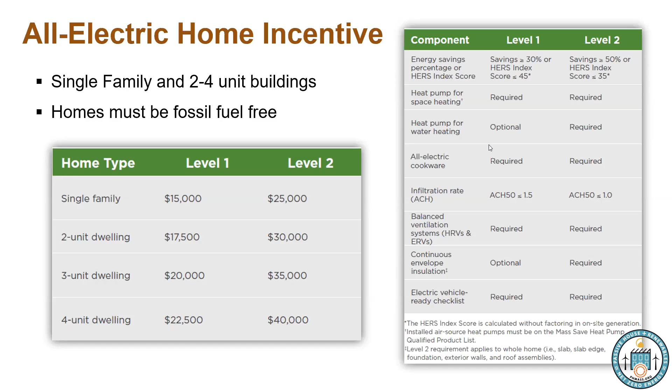I see a bunch of folks on here, and I see some names of people already taking advantage of these, so I think you guys know. But for those who haven't used these yet, I'd like to remind you that you can enroll in this program and take advantage of the first couple incentives, the feasibility study and the energy modeling, right away. And even if you don't go through with the full Passive House program, you still get those incentives. So if you go through the feasibility study and realize this isn't the right project for you, but your next one will be your Passive House project, the feasibility study is still covered.

So I encourage everyone who's even thinking about Passive House for the next project, which if you're on this session I assume is all of you, to enroll in this program and take advantage of the feasibility study from the very beginning.

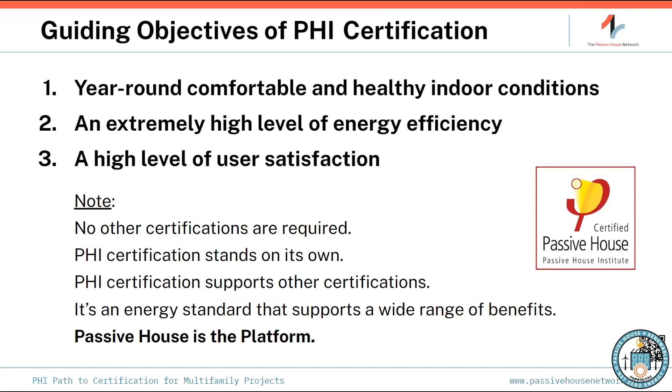Reasons to certify in general, and in this way in particular. So independent review, of course, we need this not just for general best practices, but there may be incentives, or as we know in Massachusetts, regulatory requirements. And so that's very compelling.

As compelling, perhaps, is just this idea of expertise and institutional knowledge that the process of certification brings to a project. It helps you avoid false starts and errors through the process. There's nothing worse than getting down the road and realizing you've hit a dead end and you've got to back up. You want to start out strong and continue down the path.

And as such, focusing as we are on education and capacity building, we see the certification process as a fundamental education tool and for professional development for the team across the board.

And interestingly, if you're working on a passive house project and you're not a CPHD, not a certified designer or consultant yet, you can actually earn the credential by completing the building. You don't have to take the course. You don't have to take the exam, although it might pain me slightly to say that. You can get the credential by doing a building. That's really PHI's fundamental thing, is do the building and learn by doing, as we do with so much of our professional lives. So that's another interesting way to go.

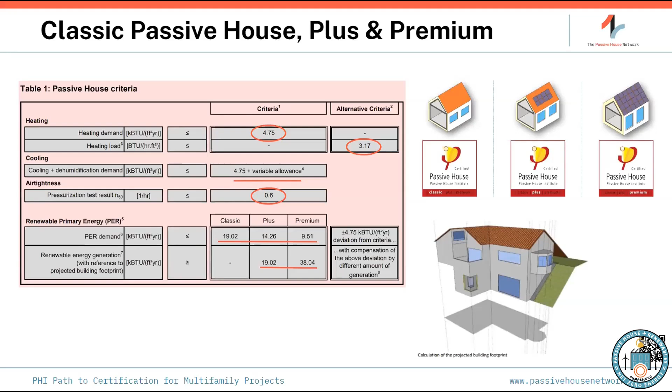On the retrofit side, EnerPHit has been around now for 12 years, and it has two different basic ways of approaching the EnerPHit certification. One is a component method—you see the values across the board for the different aspects of the envelope construction, adjusted per climate zone, using PHI climate zones. So you are in the cool temperate zone in Massachusetts. Then there's the performance method, which is basically a tweaking of those calculated performance results—from 4.75, we're going to 7.92 in Massachusetts.

Both of those methodologies then share in common a loosening of the air tightness from 0.6 to 1 ACH50, and a loosening of the PER demand. I think the renewable, however, stays the same.

Another aspect of EnerPHit is you have the classic, plus, and premium. You also have cases where the insulation is largely on the interior of the structure rather than the exterior—so you have the I, the plus I, and you have a retrofit plan that could be certified.

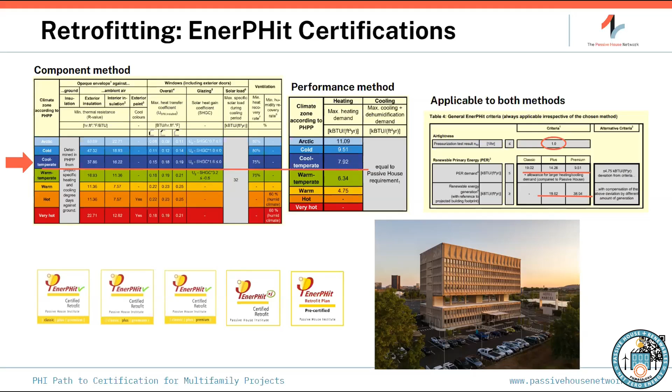And then we have the low energy building standard—you have a slightly relaxed heating requirement, 1.0 air tightness, and slightly relaxed PER, I believe. We do see this used, because for single family homes, it's still an amazing building and performs favorably across the board in relation to other standards out there.

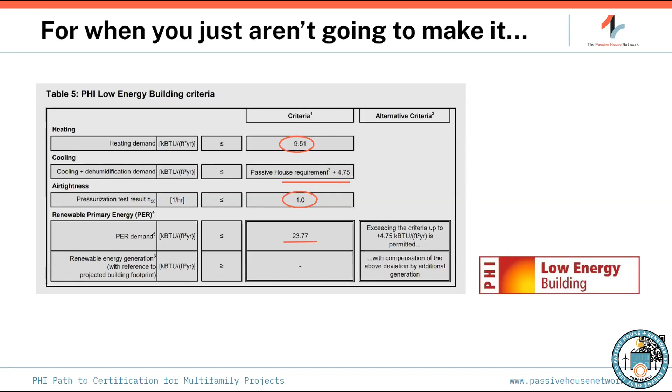We have incentives—Xcel Energy, which is supporting the Marshall Fire rebuild in Colorado, will accept a low energy building certification as a passive house. They'll also accept the other passive house certifications, but low energy is good enough. So that's a quick overview of the certifications available from PHI.

So what do we need to do to get certified? There's this great building certification guide, and really I could probably just ask you to download this and we could all go home, or go on to other work. It's a good guide—it's not going to cover everything we do here today for sure, but I encourage you to download it and flip through it. It's got great examples and links to examples of things, talks through the process, some of the rationale. I should also note that in the criteria documents, you can get quite a bit of the rationale behind what's going on there, definitions, links to critical things, so you have an authoritative reference guide.

So the primary tools that we're using for PHI certification in multifamily: virtually everything is being done in designPH, which is a SketchUp, 3D SketchUp model souped up for passive house. All the values go into that, and then it's imported into the PHPP and manipulated further there. But architecturally, a majority of the work is certainly being done in designPH.

And then you're looking at doing thermal bridge calculations as well, through Therm or Flixo or others. There's an amazing and expanding list of additional tools, some developed by PHI directly, others developed by practitioners from around the world, available on the PHI website, Passipedia, which is a resource. If you're not familiar with it, definitely go online, Google Passipedia, there's a lot of reference material there.

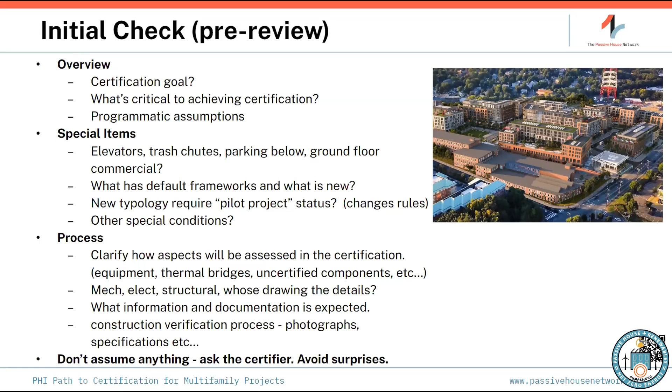So important, and to get a basic grasp of that - don't assume anything, ask the certifier, and please avoid surprises. Things change in projects, and certainly things can be unavoidable, but do what you can to lay it all on the table. Now, with many of these multifamily buildings, the commercial base is becoming standard, if not ubiquitous.

And this has been an issue historically in terms of how we're dealing with the values and how we're resolving it. Now, in the criteria book I first showed, there is this table, and it's a little mind-numbing to go through all very specifically, but basically we've got this gradation of occupancy. On the top line - the user of the ground floor is known, and we're going to build it to passive house quality: air tightness, thermal values, ventilation. So the whole building can be certified, and the plaque can go on the outside of the building on the curb. The second one - the user is not known, but we're still applying passive house air tightness, thermal, air quality, and ventilation, making some assumptions because we don't know who it is. So there are default values that have been developed for that, and you can still certify the whole building and have the plaque outside.

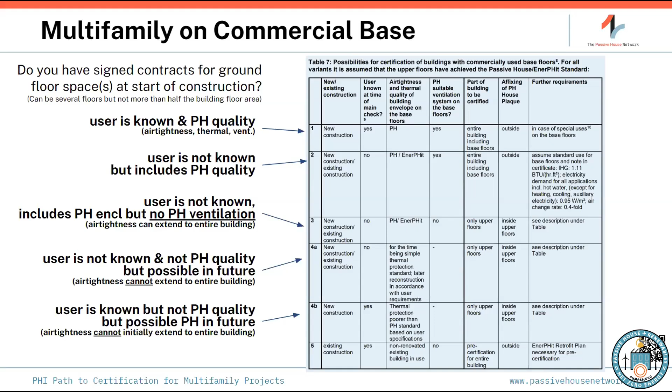So that's some of the clarifications that have developed in picking your pathway and what you're going to need to do. And what's happened is, you know, this whole question went through a process, and you need to think about when you're doing your passive house project and the typologies and what you're asking for.

Because if you are to be the first of something, often it's not going to be what I would call a normal process. It's going to be a pilot project, first generation. PHI is interested in them because that's how we extend the standards further and make it work. But they want to go through a scientific process. This is a research organization.

You know, so the PHPP is a simplified model built on lots of dynamic modeling and lots of data. So this has each new typology going through it. Then once they've got a simplified criteria, often you'll see test projects then to use it. And then they'll issue a final criteria for regular usage, and you'll start to build defaults in.

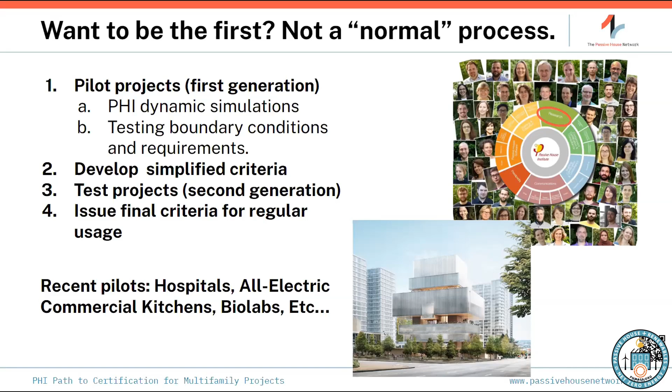So by and large, using multifamily ground floor commercial, you're at this point going to be relatively smooth sailing in terms of the criteria and defaults. But you may hit something if you're going outside the box. You want to know that. And again, that's that early check. You want to lay that out there.

So then we're going into schematic design. The team is launched, and you're working in schematic design and design development. This is important to do, I would say, before you're going into construction documents. You're going to really dig in, and the certifier is going to assess the concepts for the design, insulation and the building services, the preliminary PHPP calculations for consistency, key information, and the certifier is going to provide you feedback, and it's going to help you in managing the energy budget and your costs.

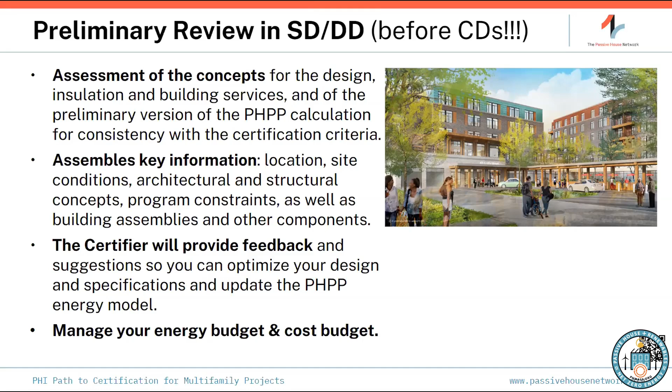So you want to get this feedback early and know that you're on the flight path. You also want to manage your energy budget like you do the cost. You need contingency in there. You don't want to be designing up to the limits. You want to buffer and build that in so that you have some latitude going forward.

A big assist in bringing together the design is to rely on certified components. PHI has an extensive library at this point of certified components, and the key components in terms of driving performance - you see them in different categories: the opaque building envelope, transparent building envelope, and building services. They're rated based on climate. The thing that's great about components that have gone through the certification system and are in the library is many of them are already in the PHPP. You've got the values, so it's predictable, high quality results, and a smoother process.

So if you go outside of certified components, then you're going to have to provide substantially more backup to prove the performance. Some manufacturers may have that ready - they've prepared for it - but others may not, and it could throw a wrench in. So you want to carefully source the critical components that are driving the energy use of the building.

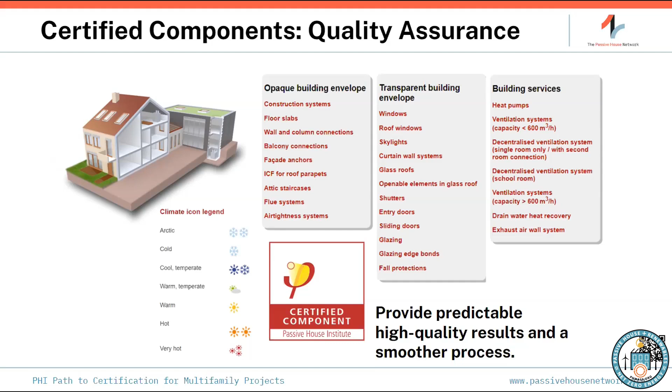I just want to outline three that we can't overemphasize how important they are: the efficiency of the ventilation units and how they perform, the performance of the windows, and the air tightness are all huge drivers of the overall energy model and optimizing cost and approach. So there are always trade-offs in this, but to not trade things out lightly, you really want to make sure you're digging into it, if to state the obvious.

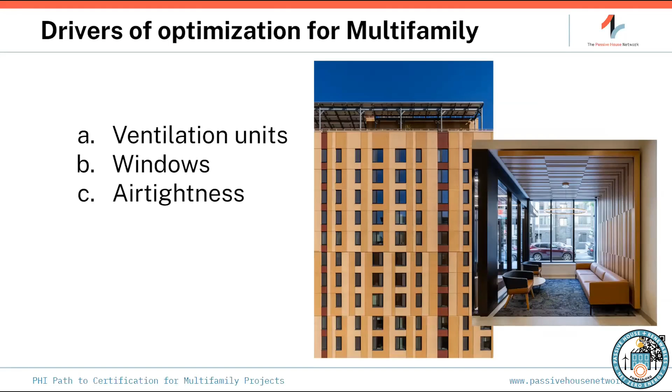As you're going through this preliminary design check, you're starting to gather information, and some things may be decided and you can upload it. PHI has an online platform for the certifiers. Not all certifiers use this - some have their own kind of checking mechanism - but this is a very powerful platform that allows you to see what's been completed and what needs to be completed. It takes some mystery out of it. It shows how far you've progressed and allows you to really zero in on what's the missing information, because there's quite a lot going on there.

Another key aspect in the preliminary design review is variance, and the idea of using defaults versus the boundary conditions, the so-called real world. The PHPP and the approach comes with a whole bunch of defaults. Everything is not a default, but there are a lot of default values in there that you can rely on for certification, and it makes perfect sense to do so. Others, maybe not so much.

Many boundary conditions and values are preset as defaults and should not be changed for certification. So for the certification, the default is fine. But if the variation of actual use is significant and known, a second variant showing it must be calculated. In the PHPP, you can run a whole bunch of variants and show different loads in different ways and different usage patterns. You can show different future climate scenarios, and it's not uncommon to do them for things like hot water or future climate or other specific scenarios.

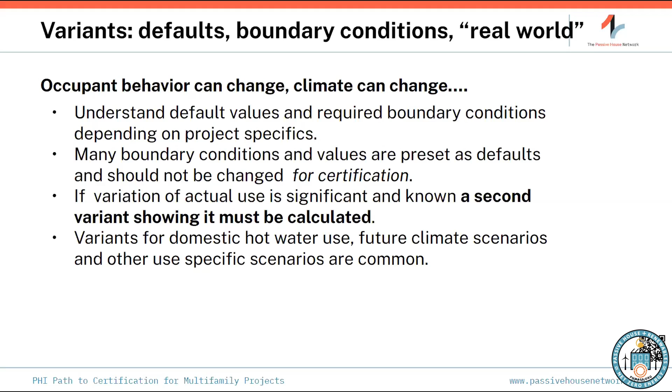It doesn't require building a whole new model - you're just putting variants into the same model. But you need to know within reason how this building is actually going to perform. There's always going to be variation, but you calculate from the facts to that point, and that may not exactly be the certification calculation. It's going to depend, but you don't want to ignore that. That checking - the second variant showing it must be calculated - is part of the certification process.

So you're continuing to design the multifamily building, and you're bringing the information up further. You're nailing down the supporting documentation, the specifications. You're making corrections per the certifier's requests. The certifier is going through the models and the documents and says, okay, this is done wrong, this needs to be updated, where's this information - to make it as complete as possible before construction starts.

A quick note on what the certifiers are thinking about, because you're in this ongoing conversation with them, are the assumptions that you're making, that the team's making, appropriate to the project? They need to see the thought process of the team. Don't be a blank slate. Don't hold back. They need as much information and to understand what you're trying to do as possible. It will help streamline the process.

Is it a complete PHPP? There are lots of little things that go into the energy calculation of a multifamily building. Are the elevators in there? Are the booster pumps accounted for? Are they accounted for correctly? What's the specifications?

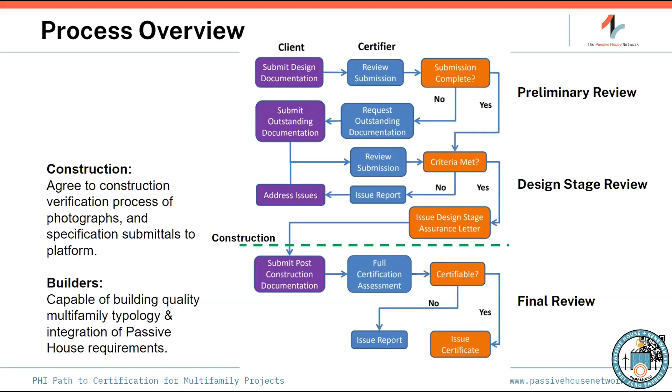So in the construction, just threw down a bunch of things here. The focus is on passive house integration with the other requirements. Where PHI is focused on the elements that are driving the energy performance and ultimately the user satisfaction and use of the building, those three original principles that we spoke to. But there's a lot going on and there's a lot of other things that need to happen.

So the construction schedule needs to have a critical path with the PHI requirements identified. You need to be looking at the sequencing and components. Things like mock-ups on a multifamily will be quite typical of critical assemblies that will be responsible for making sure that we have weather tightness, but thermal continuity as well as air tightness. So that should be planned for if needed.

A lot of this too depends on, like we were saying at the beginning, how many times has the team done this? Is this new? Have they've done 10 of them?

The more inexperienced, the more you want to go in deep, and the more experienced, the more it could just be like we're doing a blower door at the end, and not doing any blower doors down the road, and that's good enough. So trade specific training - what we're seeing is the management often getting the certified tradesperson or some aspect of it, the project manager, and then doing specific on-site trade training specific to the task at hand. Because again, it's not rocket science and they don't necessarily need to know everything.

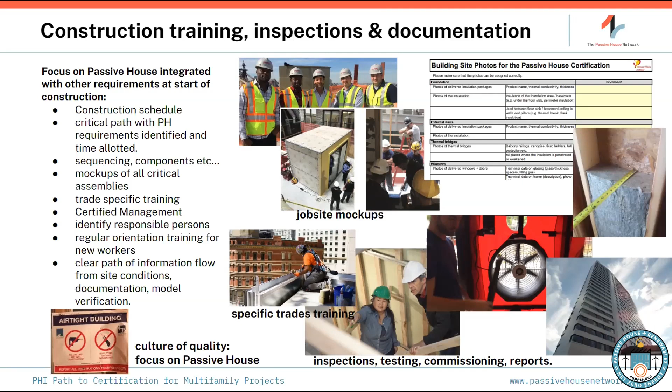So for the final review, you've gone through construction and there's a lot happening there, obviously. But at the end of the day, for the final review for certification, there are 6 things that need to be evaluated. And these have subgroups, of course, but number 1, as-built construction plans, details, and component specifications of the items - so as-built, what was actually installed, regarding the thermal envelope, the building services and other items agreed to. So everything that's driving the energy performance of the building. As-built PHPP, showing the energy balance calculation, meeting the metrics of the criteria in the certification.

The installation photographs that we've spoken of. Then the ventilation system commissioning report, because the ventilation system is like the air tightness report, which is next, is absolutely fundamental to the proper operation of a passive house building. And with those reports, you have the construction manager's declaration attesting to all that has been submitted. That's what they need, no more, no less.

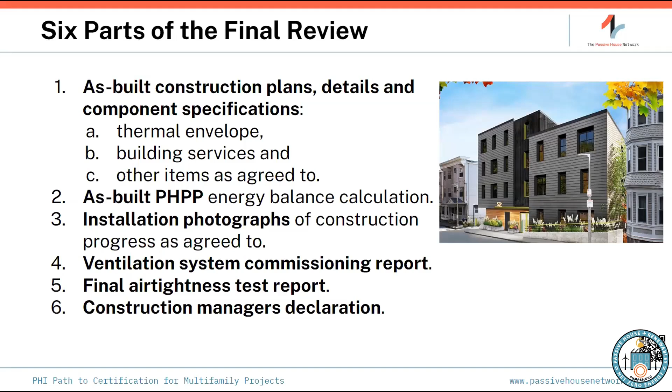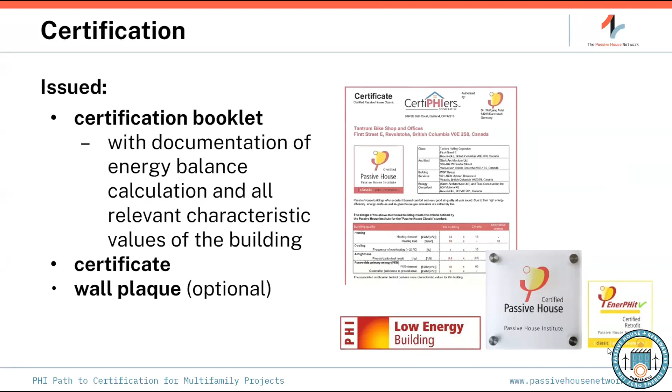One thing that I just want to stress is this is outside of the certification process, but a useful reference and something we encourage everyone - PHI has a worldwide building database, and it's less than a tiny fraction of the buildings that exist around the world and in the US. It's really unfortunate, it's been an opt-in mechanism. So as one might expect, nobody has a lot of free time to populate such a thing. We try to encourage it, but what is there, it can be quite useful.

And so we encourage people to add their project. So when you're starting your project, it doesn't need to be complete, it doesn't need to be certified. You need to have a PHPP, you need to be going for certification levels of performance, and enter it into the database and then update it.

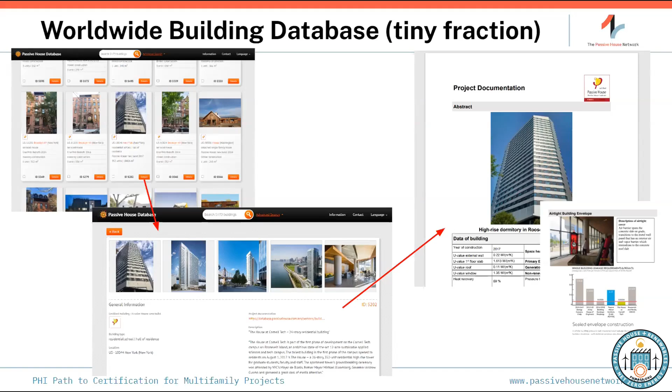And then the building certification is done. You've registered the building because it's a good thing to do. Then there's occupancy, right? And going forward, these things don't run themselves. It's not part of the certification. The certification is in the rear view mirror. You don't have to do anything going forward, but obviously having the building run as designed and built and predicted requires management. So we want to make sure everybody is focusing on that.

So finally, just some thoughts on the PHI process that we think is of use to folks doing their projects: that they have a choice of a certifier, that the scope is focused on the Passive House certification, that you can do other programs. By no means is this rigid in a way that is exclusionary. It's open, and we encourage that if desired. There's judicious use of on-site verification, and it's all very transparent in terms of the project team and what they need to see and what's available.